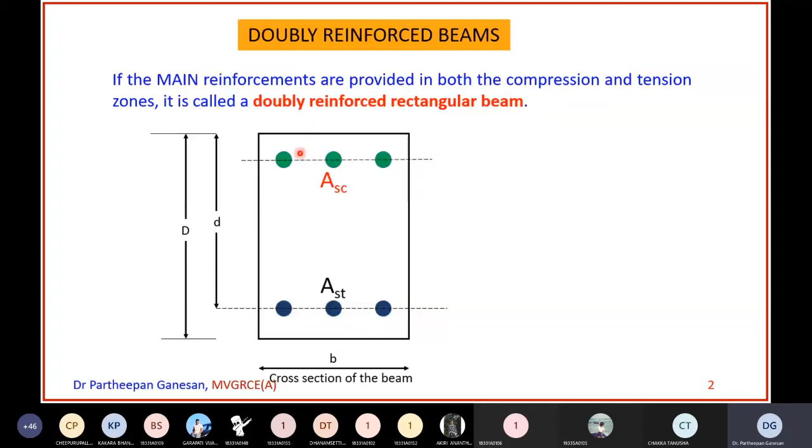Similarly, you also provide the area of steel in compression zone, that is ASC, and this is provided at an effective cover, and this is D dash. This effective cover to the compression steel is represented by D dash. Is that clear, everyone? Because this is the same thing, except in a singly reinforced beam you don't have this ASC. In a doubly reinforced beam you have ASC coming into the picture, and this area of steel in compression zone is provided at a depth of D dash, which is called effective cover to the compression steel. This is the only addition - all other things remain same. So this is how you represent the doubly reinforced beam.

So when they say effective cover to the tensile steel, that is from the extreme tension zone to this, that is effective.

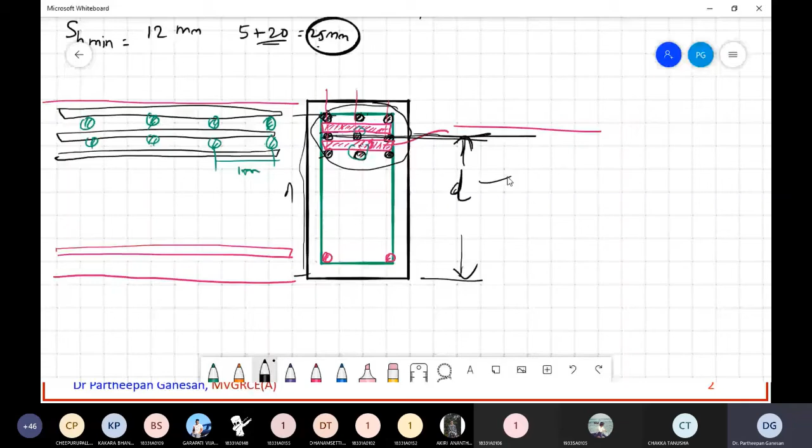One thing I forgot to mention in the earlier one. Suppose if you provided reinforcement like this, then the effective depth will become from here to - you have to find out the centroid of all this. It will be somewhere here - that becomes your effective depth. This is effective depth for whenever you have multiple layers of main reinforcement. The centroid of this reinforcement will become the reference, not from extreme fiber. I have discussed this before also. Whenever you provide the reinforcement in multiple layers, you have to find out where the centroid of the reinforcements will be - it will be somewhere here for this particular problem. So that will be effective depth, because only one layer is there in this case - so this becomes effective depth, and this is D dash.

Now look at vertical stirrups. I told you 2 leg means there are only 2 legs like this - this is 1 leg, this is another leg. Sometimes you can find 3 legged, 4 legged also, but we are not going to take that up right now.

So why should we use doubly reinforced beam? The most important question: why should we go for a doubly reinforced beam? So the reasons are given here.

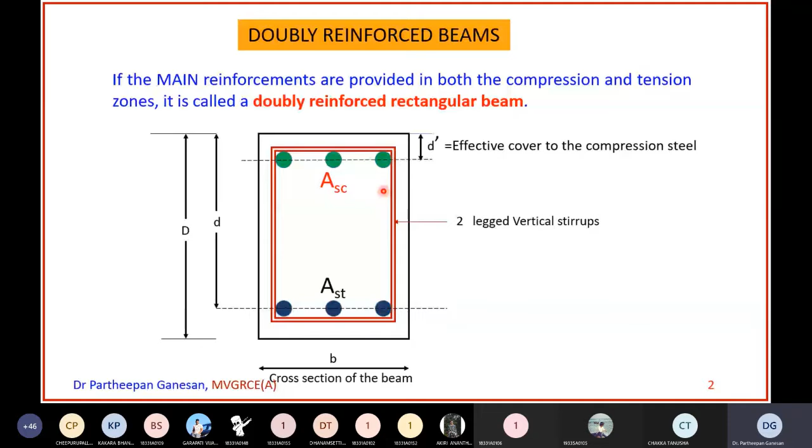Doubly reinforced sections may be necessary when architectural requirements restrict the depth of the beam. For example, for a long span beam and very heavy load, let us say the height of the room itself is 3 meters. Now, if you provide a beam of depth 1 meter, it will look very ugly in the sense that 1/3 of the room is covered by the beam height itself. But if you reduce the depth, architecturally it will have a very pleasing look. So if you want to reduce the depth of the beam, what you are doing is, in the compression zone, you are reducing the concrete area. When you are reducing concrete area, the compressive force it can take becomes very less - very less compressive stress.

So in order to increase the compressive strength, you are providing reinforcement in the compression zone also. So doubly reinforced section may be necessary when architectural requirements restrict the depth of the beam. In such cases, the beam has to carry moments greater than limiting capacity.

Increasing the depth of the beam creates two problems. One is that it increases self weight of the beam, because when compared to steel, the self weight of concrete is more. For a particular compressive force to be taken by steel or concrete, concrete will have more weight. So you are increasing the self weight by increasing the depth of the concrete.

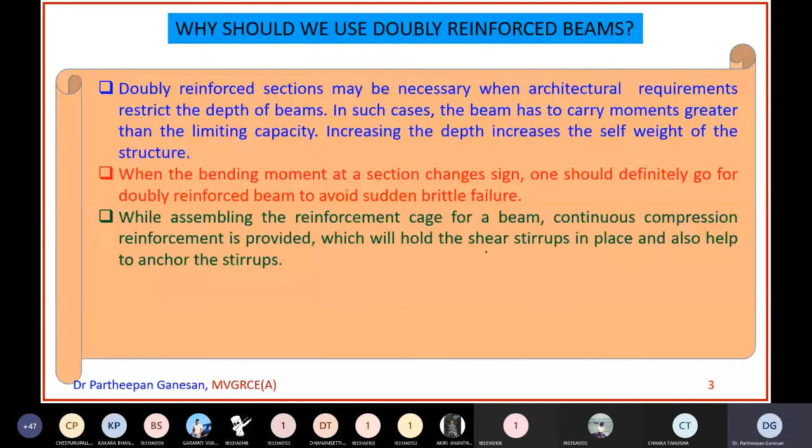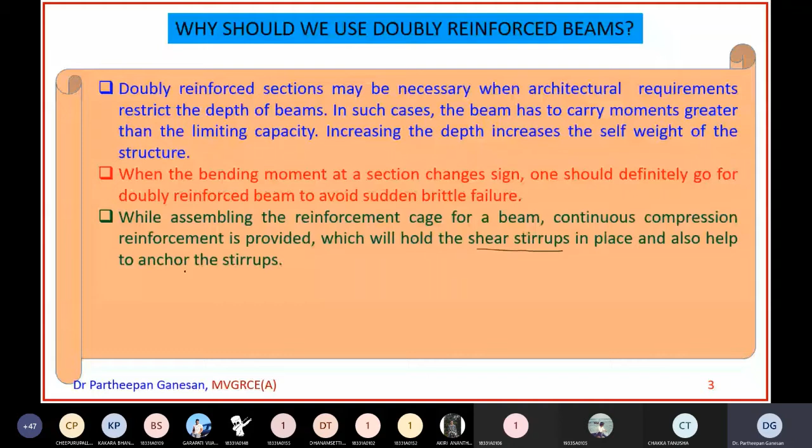Next, while assembling the reinforcement cage for a beam, continuous compression reinforcement is provided, which holds the shear stirrups in place, and also helps to anchor the stirrups. So instead of a hanger, while preparing the reinforcement cage, you are always providing reinforcement at the top, which will hold the shear stirrups also, and keep all the reinforcement intact. So that also acts as compression reinforcement.

Now, compression reinforcement provides safety in the case of reversal of stress due to wind load, due to seismic load, moving loads, or temperature stresses. For all these reasons, you should have a compression reinforcement.

Some sections of a continuous beam with wind load undergo a change of sign of the bending moment, which makes the compressive zone into a tension zone, which we discussed. These section changes can happen anywhere. Here, particularly, continuous beam is mentioned, but let us say a cantilever beam.

For example, in a swimming pool, let us say some people will be diving from here into the swimming pool. Before jumping, he will be jumping on the top of this. So it goes up, it goes down like this. It goes up, it goes down.

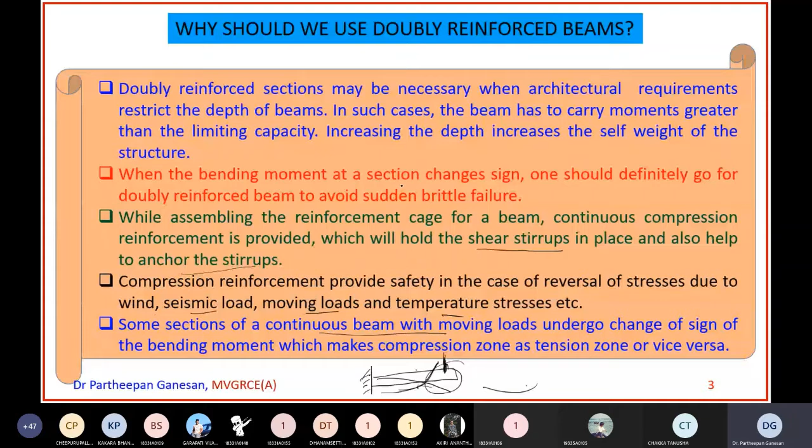So obviously tension is going to change its sign on this board. So that kind of thing also involves a reversal, bending moment changing its sign. So you have to provide reinforcement both at the top and bottom.

So now, what are the advantages of a doubly reinforced beam? If the required area of tension steel, please pay attention to this statement very clearly, if the required area of tension steel is more than the limiting area of steel, AST limit.

If the required area of tensile steel is more than AST limit, compression steel may be provided to increase the moment resistance capacity, because if you provide AST more than AST limit, this is called an over reinforced section. Brittle failure will happen and failure will be sudden. So in order to avoid that, you go for a doubly reinforced beam. You never design an over reinforced section, but you can go for a doubly reinforced section.

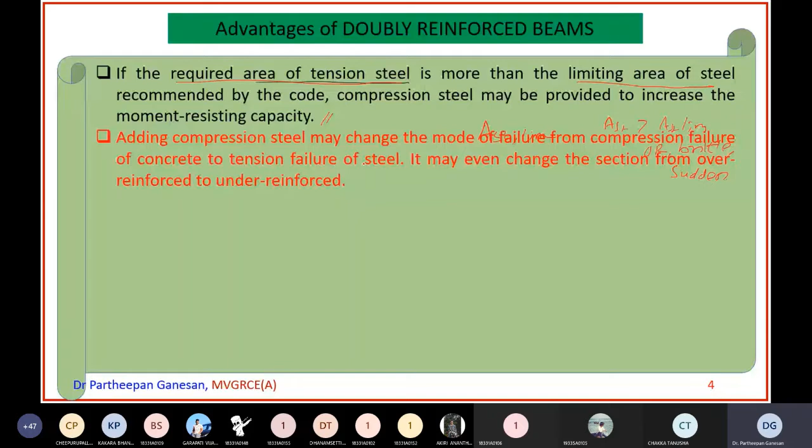Adding compression steel may change the mode of failure from compression failure of concrete to tensile failure of steel. It may even change the section from over reinforced to under reinforced section. That's what I told you.

Compression steel, in addition to increasing the resisting moment, also increases the amount of curvature that a member can take before failure, making the failure ductile. More curvature means more ductility. Thus, the ductility of the section is increased substantially, so a doubly reinforced beam will behave in a more ductile manner than a singly reinforced beam.

Compression steel is also effective in reducing long-term deflection due to shrinkage and creep.

Experiments on doubly reinforced beams have shown that the beam will not collapse even if the compression concrete crushes, when the compression steel is enclosed by stirrups. As shown earlier, in an over reinforced section compression failure takes place suddenly. But in a doubly reinforced beam, even though the concrete may fail in compression, the beam will not collapse suddenly.

Now let's look at the effect of compression reinforcement on the strength and ductility of under reinforced beams. Most of this data, numericals and figures are taken from N. Subramanian's book, Design of Reinforced Concrete Structures. The doctor has excellently presented everything, and I'm very grateful to him for the material.

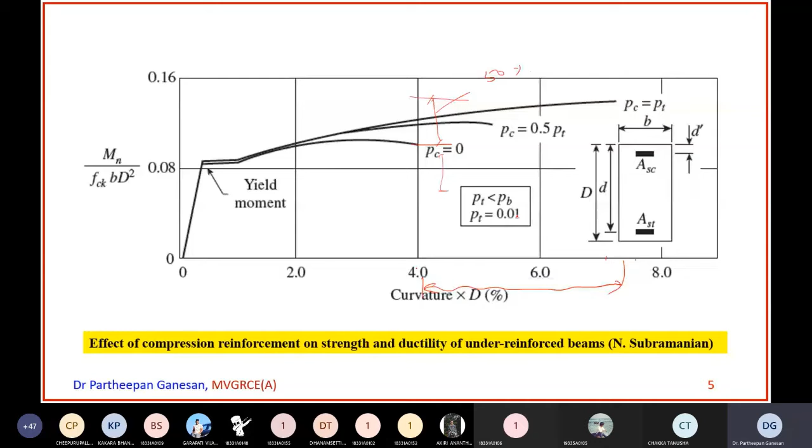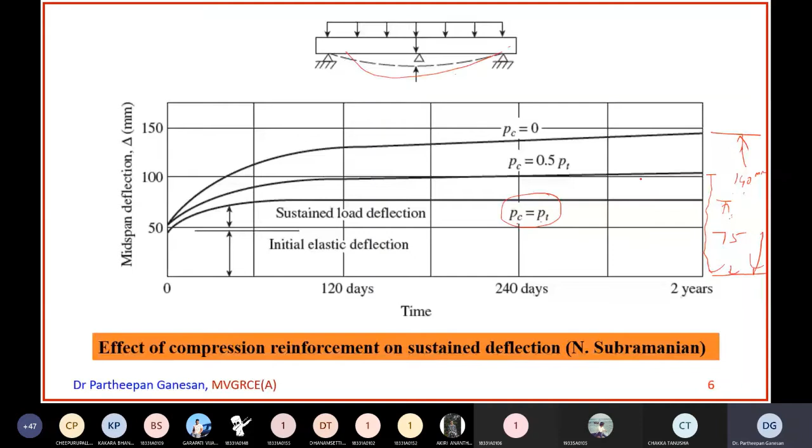Now, how will the stress block of doubly reinforced beams look like? It is exactly same as what you have for a singly reinforced beam, except that you are going to add.

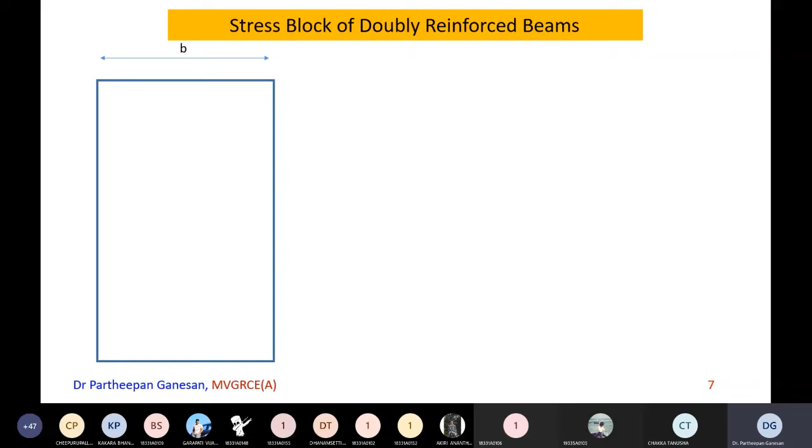We have the cross section of the beam only we are taking. The width of the cross section is B, and D is the overall depth of the beam, right?

D is the overall depth, from top to bottom. Now this is the cross section of the beam. This is the AST, remember, I am writing AST at the bottom.

This is the distance, the centroid of the tensile steel. Centroid of the tensile steel. Here is the stirrups, this red is the stirrups link. Stirrups is also called the link. Okay.

The distance between the topmost compression fiber to the centroid of the tensile steel is the effective depth.

Now for this, let us say this is your neutral axis, where the stresses and strains are 0 along this layer. Above this layer, even in a simply supported beam, all the layer above this will be compression.

All the layer below this neutral layer will be in tension. Now this x is the depth of neutral axis.

Now, this is the strain diagram which you refer to, page number 69 or 68. The maximum strain is 0.0035 according to 38.1 assumptions.

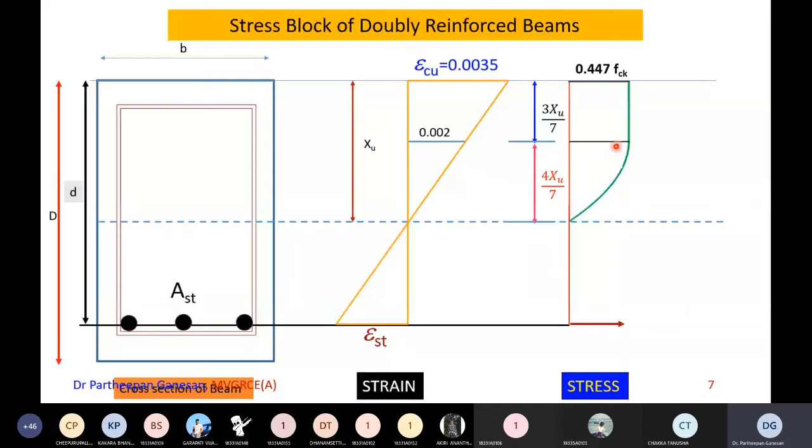Now, if you find out the total compressive force taken by the concrete, C suffix C, compressive force taken by the concrete is 0.36 FCK XU B. One thing, if you observe very clearly, compressive force I am always drawing towards this arrow is towards the left side.

Tensile force I am drawing towards the right side because this compressive force and this tensile force form a couple in an anti-clockwise direction. Okay, so don't show compressive force also in this side. Compressive force on this side, tensile force on the opposite side.

Similarly, here also you see compressive strain on this side, tensile strain on the other side. Okay, so that is to indicate above this all are compression, below this neutral axis all are tension.

Okay, right, so C suffix C is the compressive force resisted by the concrete alone, concrete in this compression fiber, 0.36 FCK XU into B.

This will act at a distance of 0.42 XU, right? 0.42 XU is the distance at which this compressive force acts.

Where the tensile force is called FST into AST. This total tension force resisted by all these steel put together is FST into AST, where FST is the stress in the tensile steel, AST is the area of total tensile steel.

FST: normally, in an under-reinforced section, FST will be equal to 0.87 Fy. Okay, so now this is all same whether it is a singly reinforced or doubly reinforced.

Anybody have any doubt? Doubly reinforced beam is most important. Most of the time in the examination or interview they will ask about it. So you should be very clear about it. So any question?

Anybody have any question, please?

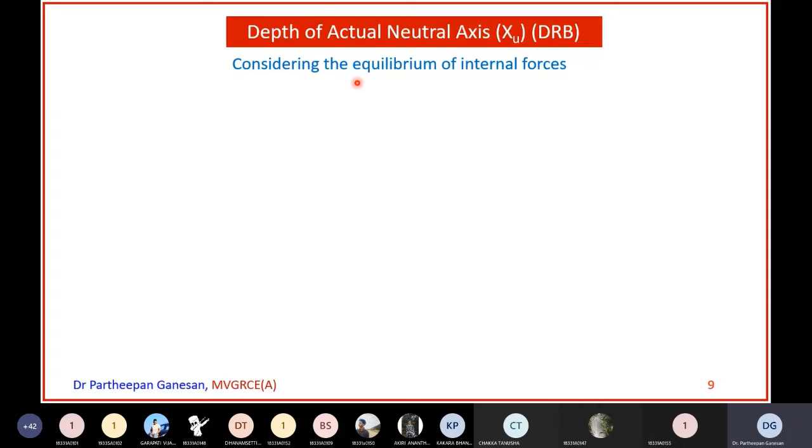So this acts as a distance of d dash. So these are all things that we have seen. Now, how to find out the depth of neutral axis? You should always consider the equilibrium of internal forces, that is compressive force is equal to tensile force. In compression force you have two terms, and tensile force a single term. That and all, if you write out all these things, you finally get this kind of equation.

This compressive force is resisted by the concrete, and compressive force resisted by the compression steel. This tensile steel term is 0.87 Fy into AST, because mostly we will design only for under reinforced section. So in under reinforced section, FST will become 0.87 Fy because steel starts yielding first.

So based on this, you can find out X is equal to 0.87 Fy AST minus FSC ASC, divided by 0.36 FCK B. In some case, let us say if your beam is not under reinforced, if it is over reinforced, then this is not 0.87 Fy. You have to substitute the actual value of FST, not 0.87 Fy. While solving numericals, we will see that. This is the way you find out depth of neutral axis for a doubly reinforced beam.

Now, this FSC value, if you have mild steel or Fe250 steel, which I explained sometime back also, is epsilon SC into Young's modulus of steel. Remember, this is only for Fe250 steel, not for any other steel. So this value should always be less than 0.87 Fy. For example, for Fe250, 0.87 into 250 will be almost 217.5, or some people take it as 218. So this FSC value, the maximum, the highest stress possible in that mild steel is only 218 Newton per millimeter square. You cannot go beyond that.

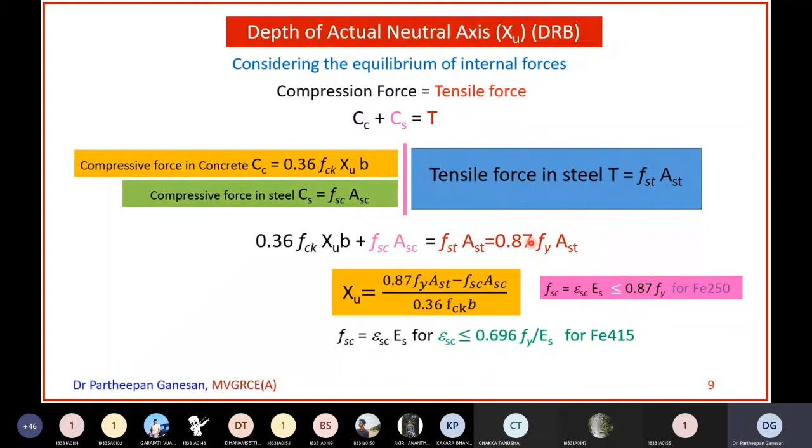Next, for Fe415 steel or Fe500 steel, FSC is given by epsilon SC into Young's modulus of steel, for epsilon SC less than or equal to 0.696 Fy divided by ES, because your stress strain curve is linear up to this point, up to this strain of 0.696 Fy divided by ES. After that, your stress strain curve has a parabolic part, which we also showed long back. So while solving the numerical, again we will get back into that.

Now, how to find out the ultimate moment of resistance? Remember, we discussed the compressive force resisted by the concrete, which is acting at a distance of 0.42 XU. So naturally, the distance between compressive force and tensile force is called the lever arm. Lever arm is D minus 0.42 XU, because from top to this level is D. From here to here is D. And this is acting at a distance of 0.42 XU. So the lever arm distance for compressive force and tensile force is D minus 0.42 XU.

You also have a compression force resisted by the compression steel, acting at a distance of D dash.

So for this force and for this tensile steel, the lever arm will become d minus d dash. If you want to find the moment of resistance, you take the moment of all these forces about this tensile steel. That is taking moment of all forces about the tensile force. What do you get? Cc multiplied by perpendicular distance, then Cs multiplied by perpendicular distance d minus d dash, that's the second term.

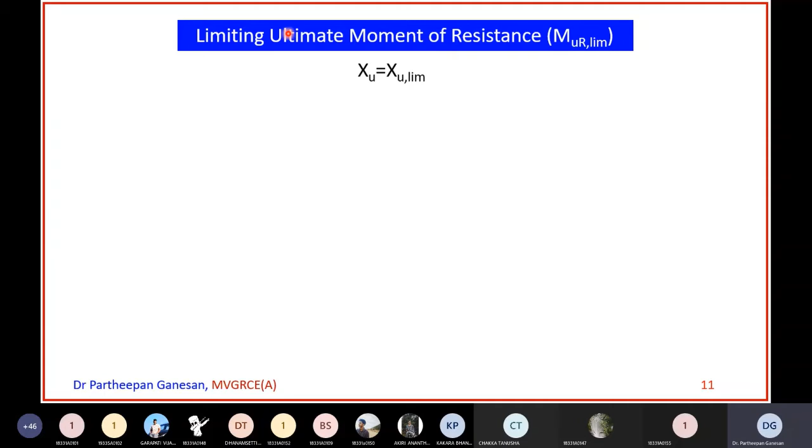Now, how do you find out? Just like in a singly reinforced beam you have a MUR limit, similarly you also have it for a doubly reinforced beam. This is the limiting moment for a balance section. MUR for a balance section is called the limiting ultimate moment of resistance. In a balance section, XU will be equal to XU limit.

If XU is less than XU limit, what kind of section is it? Under reinforced. If XU is more than XU limit, it is over reinforced. XU equal to XU limit is a balance section.

Now, if you replace XU with XU limit in the previous equation, that becomes your limiting moment of resistance for a doubly reinforced beam. Remember, in a singly reinforced beam you have only this term; in a doubly reinforced beam, this is the additional term.

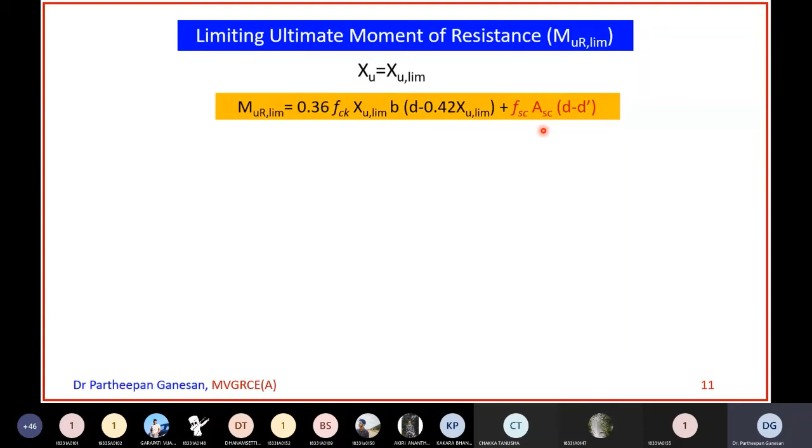Now, compression reinforcement for a balance section. Just like you have AST limit, the percentage of tensile steel required for a balance section, similarly for compression steel the limiting percentage PC limit is given by 0.87 Fy into Pt minus Pt limit, divided by FSC minus 0.447 FCK, for XU equal to XU limit.

If you clearly observe, this term is written in blue because compared to FSC, this value will be much less. So in many books you can easily neglect this. For example, FSC for Fe415 steel may be around 350. If you're using M20 concrete, this value will be only 9. So 350 or 341 does not make much difference to the percentage of steel. That's why many books have neglected this 0.447 FCK term. If you want to use it, that's fine, or if you don't want to, it's okay.

Fy is the yield strength of steel, 415 or 250 or 500. Pt is the percentage of provided reinforcement, that is 100 AST by BD, called PT. PT limit is 100 AST limit by BD. This is PC limit, meaning percentage of compression reinforcement required for the limiting section. FSC is the stress in the steel, so this is the PC limit.

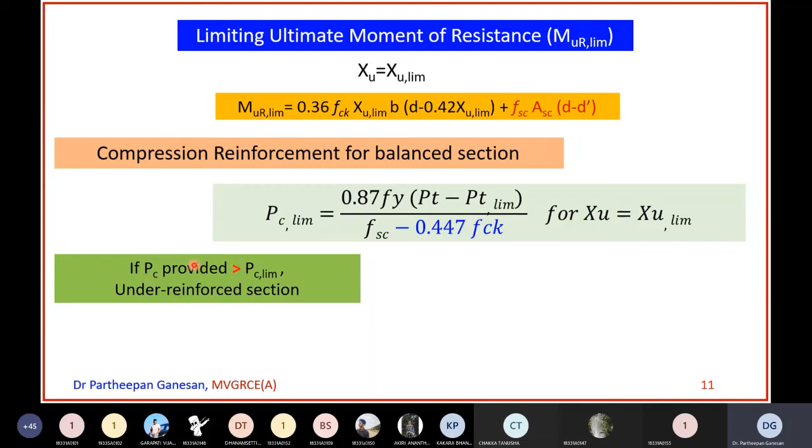Now, if PC provided, the percentage of compression steel provided, is greater than PC limit, it is an under reinforced section. Please remember this is completely inverse of your tensile reinforcement. If the percentage of steel provided in the compression zone is greater than PC limit calculated from this equation, then it is under reinforced. Otherwise, if PC provided is less than PC limit, it is an over reinforced section. So you have to increase the amount of reinforcement in the compression side to make it an under reinforced section.

Now finally, you can also write this MUR limit based on the steel. This is represented with respect to compression forces — this is compression force, this is also compression force. Suppose we want to write it with respect to tensile force, this is the formula: 0.87 Fy AST limit into D minus 0.42 XU limit. This is for the balance section.

Plus 0.87 Fy into PT minus PT limit, into D minus D dash, by 100. So you can use this equation or that equation.

Remember, this equation is not given in the code. This moment of resistance in terms of tensile reinforcement, limiting moment of resistance in terms of tensile reinforcement, is not given in the code. So you should make a note of it.

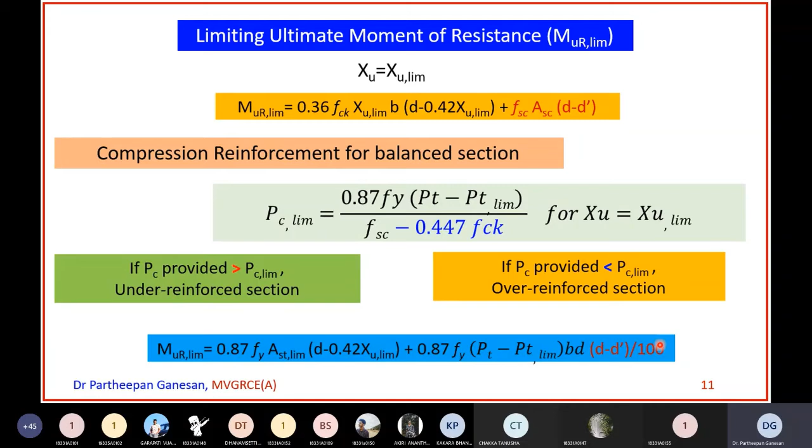Okay, so now when a beam is considered to have compression steel, let us say you provided some steel, whether it will be accounted towards compression steel or not is decided as follows: when Asc is provided, it should be equal to 0.4% of the area of concrete in the compression zone above the neutral axis. If you calculate the area of compression zone alone, multiplied by 0.4%, at least that much area Asc should have been provided. Then you can consider that as compression steel. If it is provided less than that, it is not considered.

Either this one, or 0.2% of area of the whole cross section, including, for example, if you take a rectangular section, let us say this is your neutral axis, XU, this is B. So either it should be 0.4% of B into X, this being concrete in the compression zone, or 0.2% of B into D, the whole section.

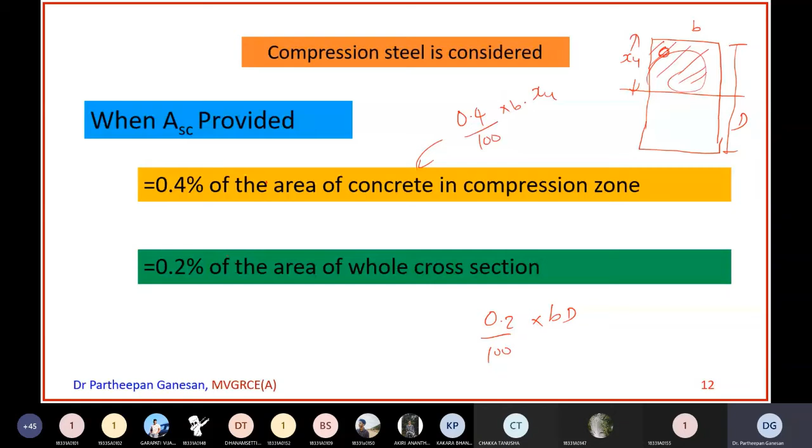So either this much should be there or this much should be there. Then only the steel provided in the compression zone is taken into account. Otherwise, we will simply neglect this steel. It is not able to take any compression force. That's how it is taken.

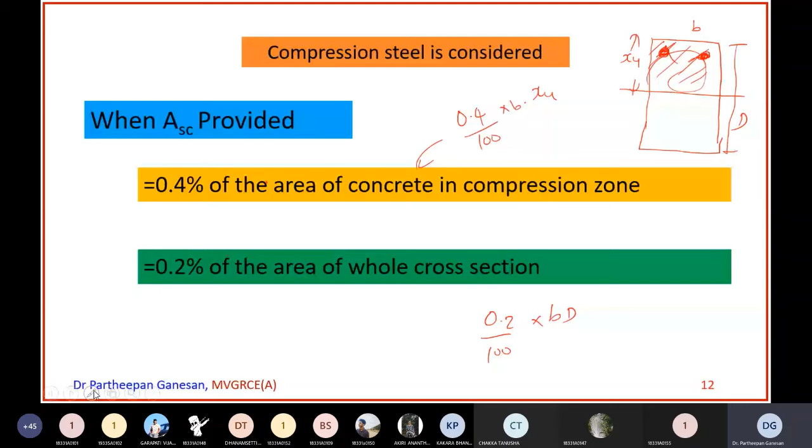This yield strain value, epsilon y, is calculated as 0.00108, which I explained some time back also. Please go back and prepare that. 0.00108, that is the strain at yield for Fe250 steel.

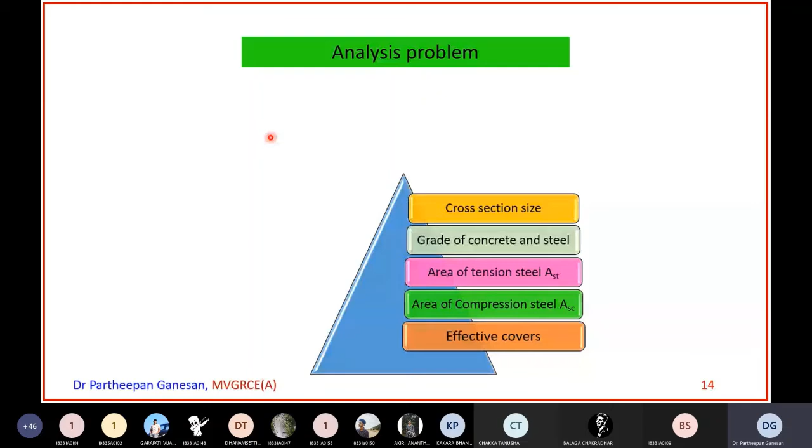So what will be asked is you have to find out the capacity, that is the flexural capacity or moment capacity of the section. That is called an analysis problem. So here you will be given cross section size, grade of concrete and steel, area of tension steel. If it is a doubly reinforced beam, you will also be given area of compression steel as well, and then the effective covers to this steel will be given. Then you will be asked to find out the ultimate moment of resistance of the beam, this is the flexural capacity of the beam. So this is an analysis problem.

In the design problem, what are the data given and what are we supposed to do?

In the design problem, load will be given, span will be given. So you have to find out grade of concrete and grade of steel, which will be given. You have to find out the cross section size. You have to find out area of tension steel, area of compression steel, right? That is called design problem.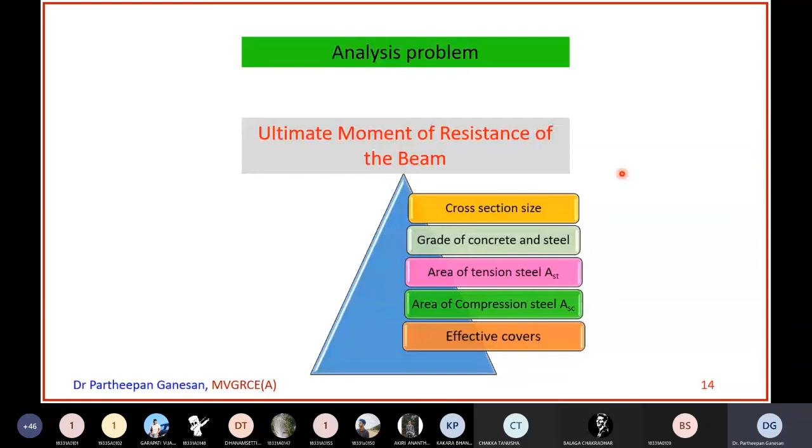So first we will look at analysis problem, then we will go with the design problem, right? So first, analysis problem.

Calculate the ultimate moment of resistance of a doubly reinforced beam having b equal to 300 mm, effective depth d equal to 550 mm, reinforced with rebars of 3054 millimeter square in tension zone and 982 millimeter square in compression zone, at an effective cover of 50 mm to both tensile and compression steel. Take Fy as 250 MPa and FCK as 20 MPa.

Is that clear? By reading, because in the examination they will not always tell you directly, here it is written as a doubly reinforced beam. But many times this 'doubly' will not be given. They will simply write calculate the ultimate moment of resistance of a beam having this data. You should ascertain whether it's doubly reinforced or singly reinforced, because here it's clearly given reinforcement in tension zone and in compression zone, so you should know it is a doubly reinforced beam.

So as usual, the first step, you write down all the given data with the symbols. B is 300 mm, D is 550 mm. As I told you, effective cover to the compression steel is D' equal to 50 mm. AST is given, ASC is given. Fy is given, FCK is given.

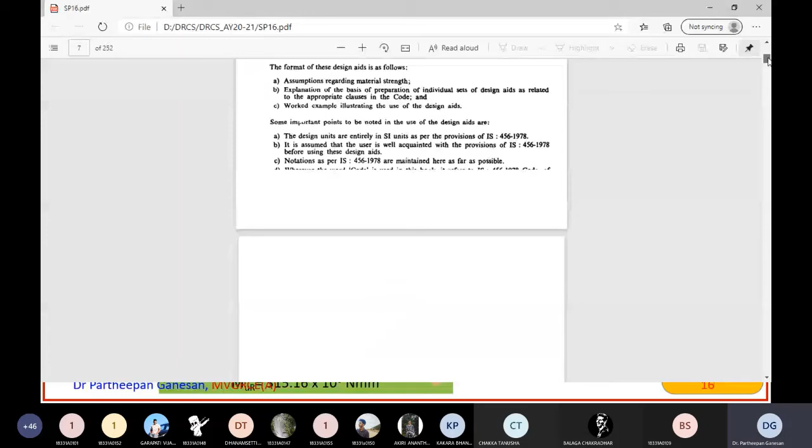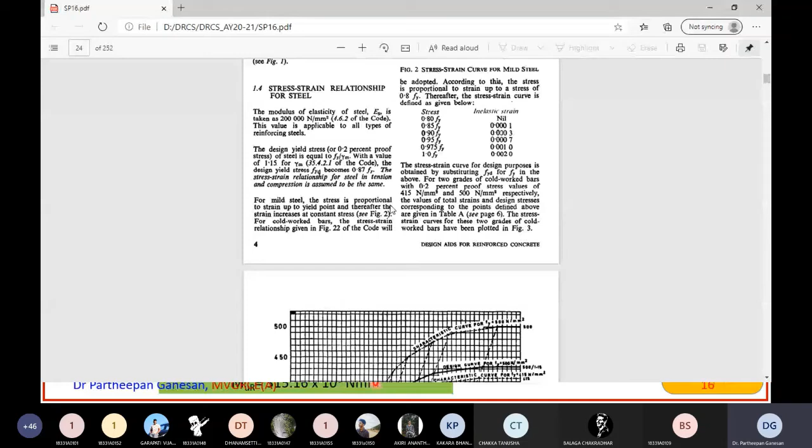So this curve 3, figure 3, I told you this is from SP16 only. There, this is the stress strain values, and there's also another one given in terms of a table. That also I gave in the PPT, right? Now here, if you see.

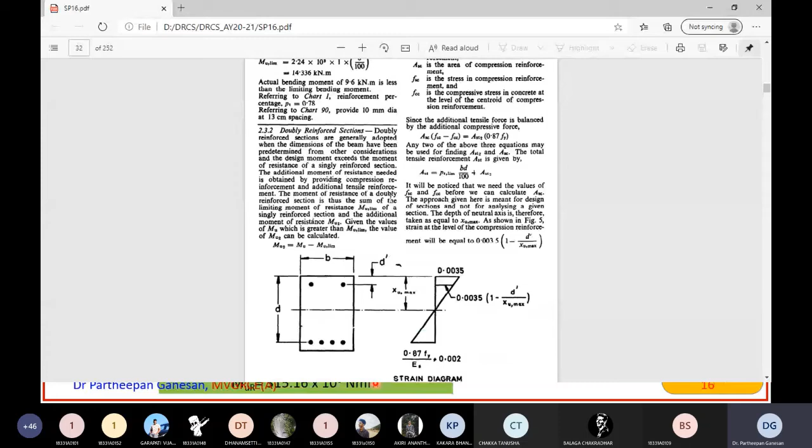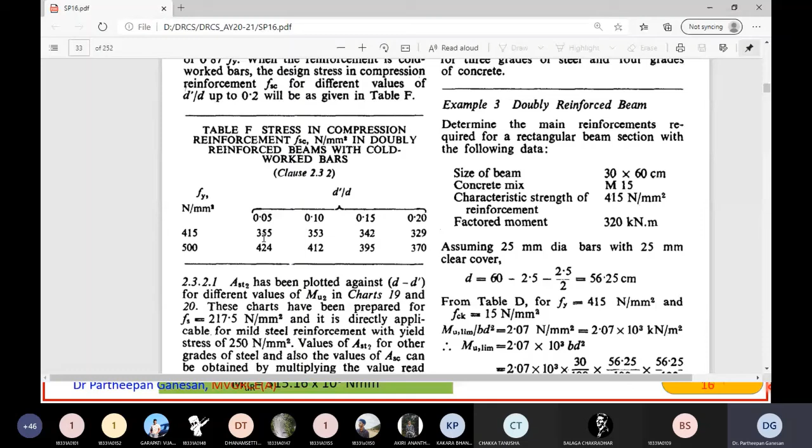See here, if you read this sentence: the approach given here for doubly reinforced section is meant for design of section and not for analyzing a given section. So many people use this method for analyzing the section, but the code clearly says the approach given here is meant for design, not for analysis. Many times people take d dash by d, and from this they take the FSC value, finding d dash by d and then taking the value from here. If it is 0.1, 353, if it is 0.05, 355, and in between you linearly interpolate. But that is only meant for design, not for analysis. So I found this method to be more appropriate for finding out the moment of resistance.

That is why I have chosen this method. But this is given in Design of Reinforced Concrete Structures by Menon and Pillai, and Subramanian also follows this approach. But all other books follow some different approach, which in my opinion can be used for design, not for analysis, as per the Indian code.

Okay, any doubt in this so far? Anybody? If any one of you has any doubt, yes. Sir, once again repeat the epsilon SC, sir.

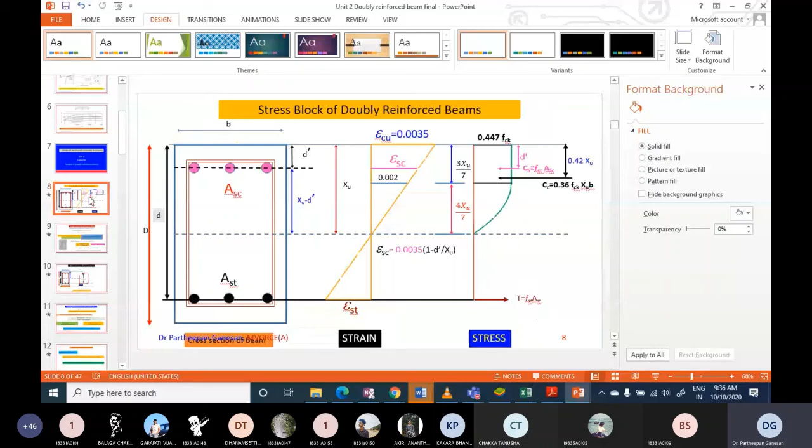Epsilon SC, see, epsilon SC means what? Strain in the... one second. See here, one second. From this you already found out XU value to be 208, right? This is the neutral axis, this is the extreme fiber, this is 0.0035.

So for this much height the strain is 0.0035, right? Now I want the strain at this place. This height is how much? D dash, right, D dash. And what is this height from the neutral axis till here? That is XU minus D dash. So for XU it is 0.0035, and for XU minus D dash it will be epsilon SC. That epsilon SC comes from the similar triangle principle, right?

Yes sir, that's all. Any other doubt? No sir, thank you. Anybody else? Sir? Yeah. Sir, previously we found out the XU.

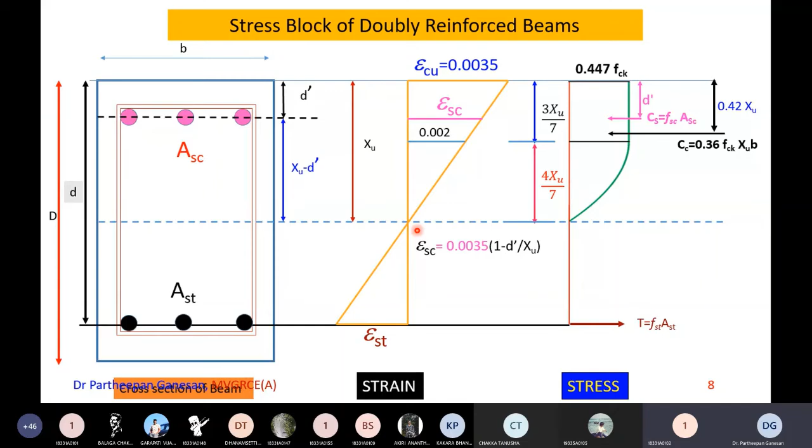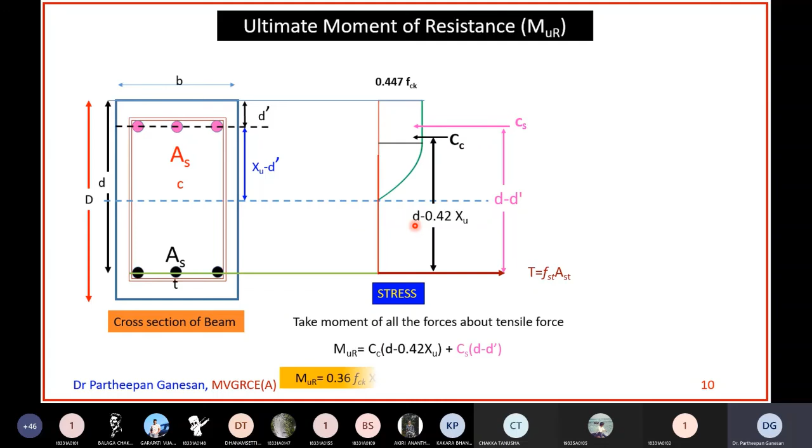Why should you take FST and FSC as 0.87 fy? Because that is the maximum value, I cannot go beyond that. And if you have to take a value less than that, less than can be any value, there can be infinite number of values less than 0.87 fy, right?

See sir, why should you take 0.696 fy? Is it possible, sir? Because if you do the tensile test on Fe415, Fe500 steel, it almost follows this line, till up to this much it will be linear. This is from the experimental curve.

So if you test the steel, it will almost follow the linear line up to this much. After that it starts yielding, right? This is the approximation. Steel will always exhibit some initial linearity, that is, stress will be proportional to strain. So they found that this will be a good approximation. That is why 0.696 fy is taken.

Okay, okay sir. So any other doubt? So these are again very simple: find the XU max value, find the XU value. The only difference is that here FSC comes in.

Now this formula is also written here. In some books they write it like X is equal to FST into AST minus FSC minus FCC into ASC, like that, divided by 0.36 FCK into b. This is for, suppose in a compression zone, if you are providing 2 rods.

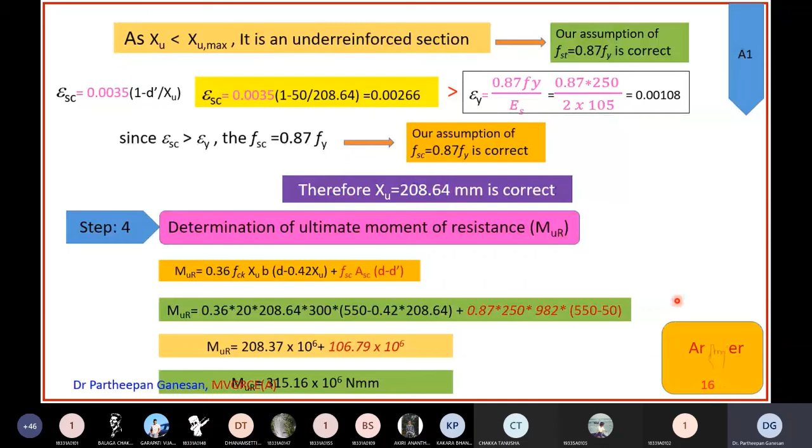Now the next question is the same problem, but instead of Fe 250 steel, you have Fe 415 steel. All other data remain same. Only thing is that Fy has changed to 415 MPa.

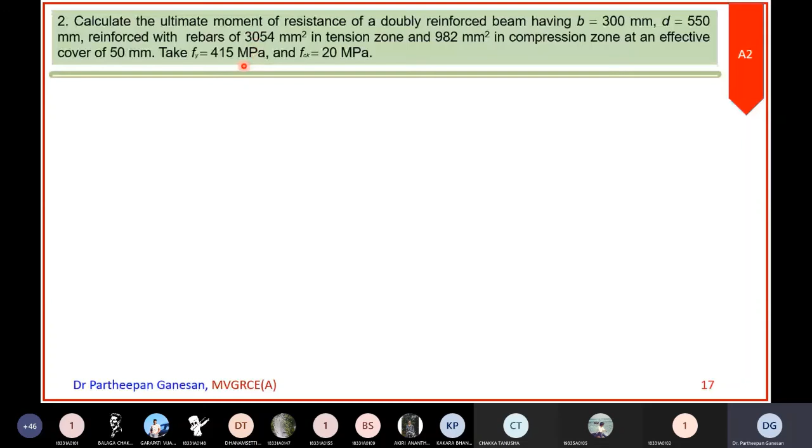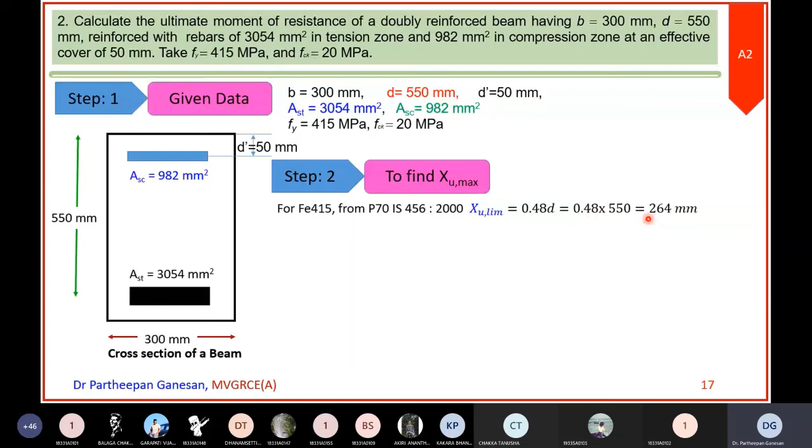Now let us see how the moment of resistance varies. Step 1 is given, same as whatever we have done in the previous sum. Xu max of course will vary because Xu max for Fe 415 steel is 0.48D as opposed to 0.53D in Fe 250 steel. So you got 264 millimeter as the Xu max or Xu limit.

Now again you have to find out XU. We are writing the same general equation. In this, FST and FSC you assume as 0.87 Fy, both values are 0.87 Fy. AST you know, ASC you know, FCK you know, B you know.

So if you substitute all these values in this formula, you are getting XU as 346.34 millimeter.

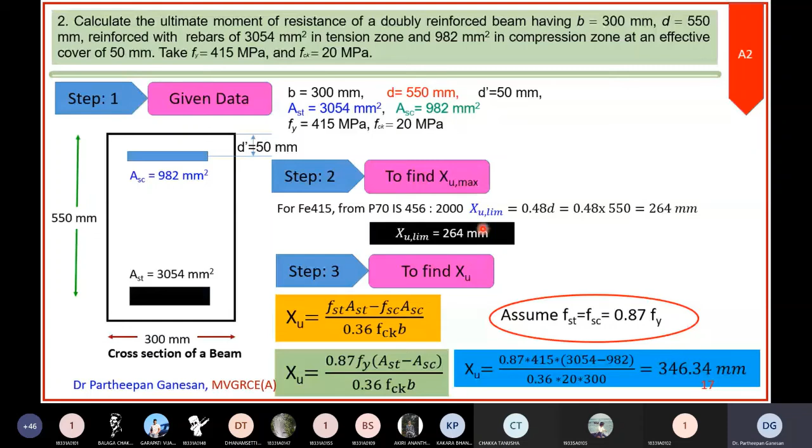Obviously when you compare XU value with the Xu limit, it is an over reinforced section. Over reinforced section means your tensile steel will not yield. Remember, before tensile steel yielding, your concrete in the extreme compression fiber will fail, will crush.

So FST equal to 0.87 Fy is not a correct assumption, which means your calculated value of XU is not correct. So since it is coming out to be an over reinforced section, we can take XU as XU limit.

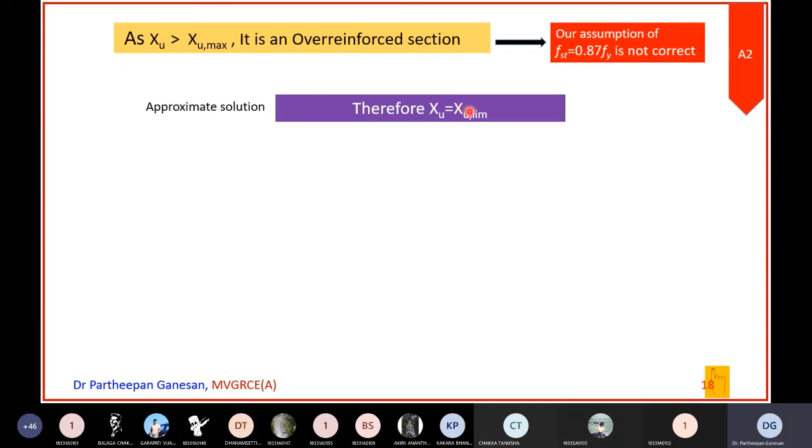Remember this is only an approximate solution, but if you want the exact solution, you have to do it in a trial and error manner. That I am skipping now. You can just use this one, since it is an over reinforced section, you can use Xu is equal to Xu limit.

Then find out the limiting moment of resistance for a doubly reinforced beam: 0.36 FCK Xu limit B into D minus 0.42 Xu limit, plus FSC into ASC into D minus D dash. Now the problem is we have not found out the FSC value.

So to find out FSC value, because it is considered as Xu is equal to Xu limit, you have to use this equation: 0.0035 and 1 minus D dash divided by Xu, but in this case Xu is equal to Xu limit. So if you found that, it is coming out to be 0.00284.

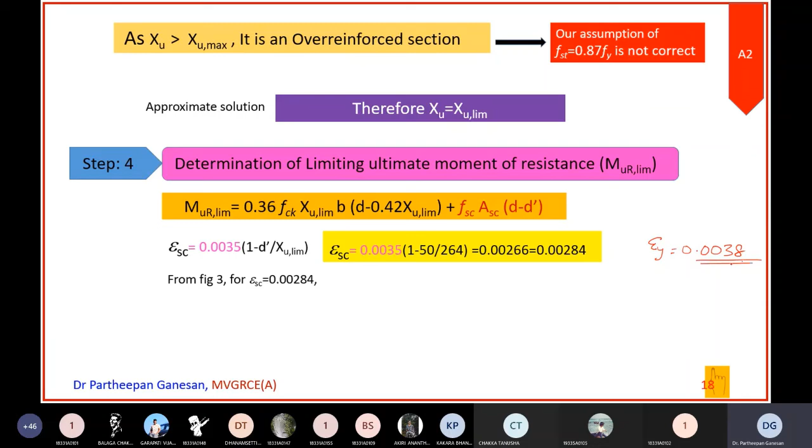Now what is the yield strain for Fe415 steel? If you remember, from figure 3, yield strain for Fe is equal to 0.0038 something. Obviously your strain is only 0.00284, which is less than the yield strain of 0.0038. So your FSC value, if you calculate it, FSC will be less than 0.87 Fy.

Now that you have to find out from figure 3, epsilon SC is equal to 0.00284, that comes from this figure. I will show in SP16.

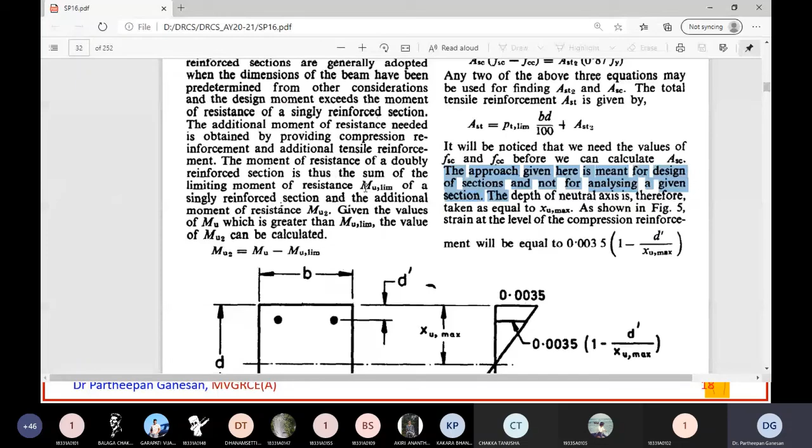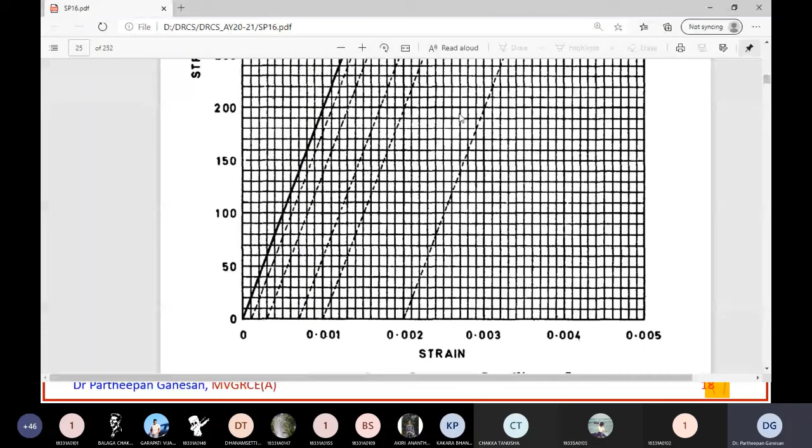Figure 3. See here, this is 0.002, this is 0.003, this cannot be calculated, that's the problem. Okay, so are you able to see the graph? Yes sir. So is the cursor visible near the strain? Yes sir. Okay, so this is 0.003, this is 0.002, so 0.0028 will be close to this somewhere here. So if you go along this line, in the top, whatever the value is there, that is your value.

Sorry, actually we can't see it, the cursor is not visible in this. So what will I do? One second, I will put it. I will see whether I have the figure here or not. Okay, remember this 0.00284. I will show you where it is. Is it there somewhere, this graph? I have put this graph somewhere, I have to see. No, here, okay.

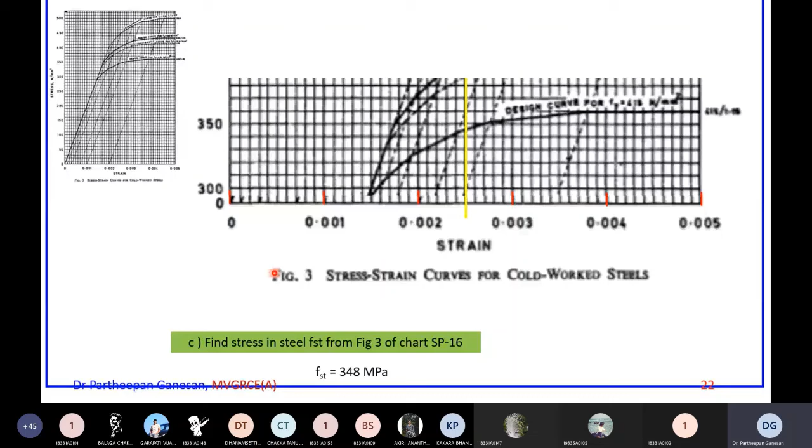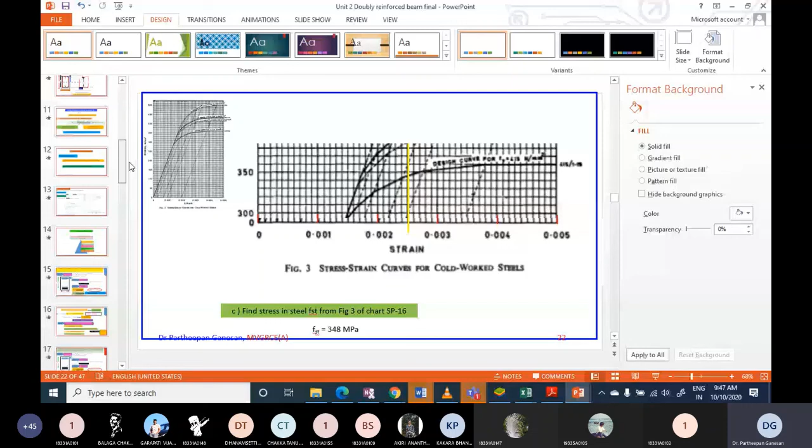Or what you have to do, you have to use this table, I don't know if the table is here or not. Yes, here. See, for Fe415 steel, here you see here, 0.00276, how much is the value? 351. So at 0.0038 it is 360. So for 0.00284, it will be more than 351, less than 360, and it will be close to 351 only because at 0.00276 it is 351. So 0.0028 will be 352 or so, whatever.

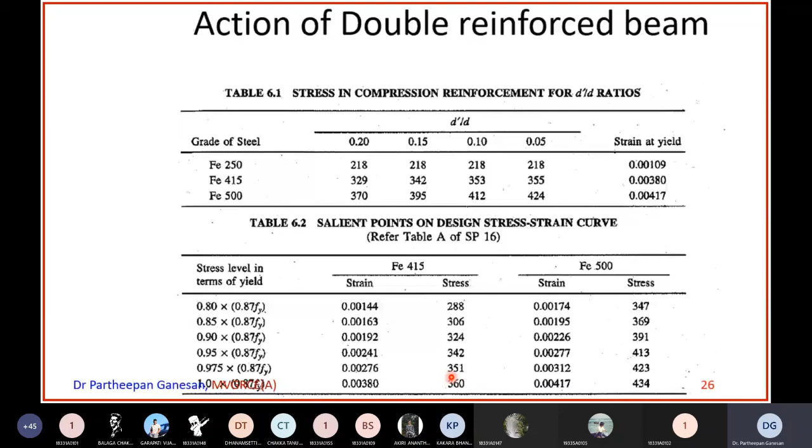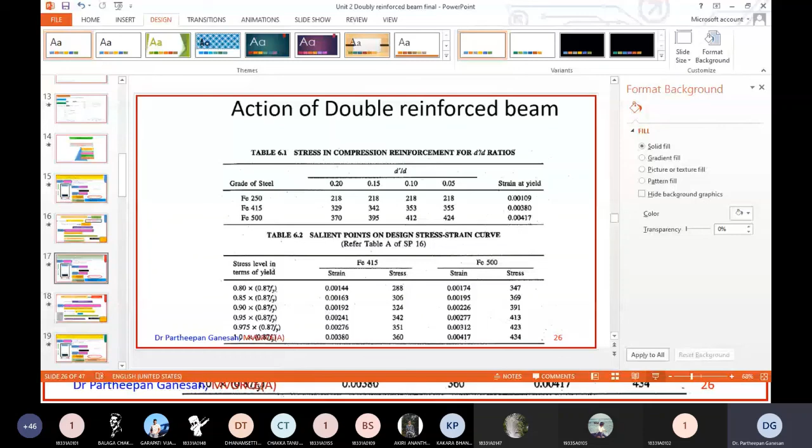Okay, so you can interpolate there, you can get the values. So what I got here is... okay, this is... done.

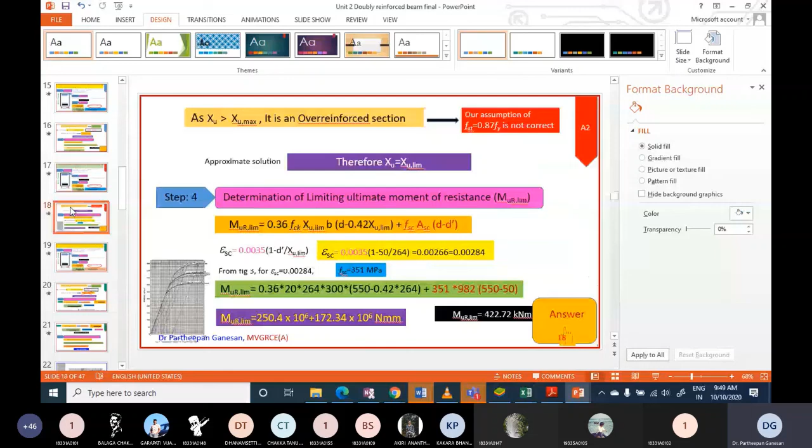So epsilon SC is coming out to 0.00284. So if you do interpolation, 0.00276 to 0.0028 is almost one and the same. So for epsilon SC equal to 0.00284, your FS is 351 MPa, you have taken from this figure. Okay, from the table it will come 352. So 351, 352 does not make much difference. So FSC is equal to 351.

0.87 into 415, how much? Calculate and tell me, 0.87 FY. 0.87 into 415, how much? 361.05 sir. So if your steel got yielded, the stress would be 361. But because it has not yielded, you got only 351. 351 is less than 361, that is why the steel has not yielded, and the amount of stress is 351 MPa.

Now substitute this 351 MPa here. ASC, you know, all our quantities you know. So MuR limit is equal to 0.36 FCK, Xu limit you found out before only, 264, 300, D minus 0.42 Xu limit, plus FSC, ASC into D minus D dash. You can also write directly this one.

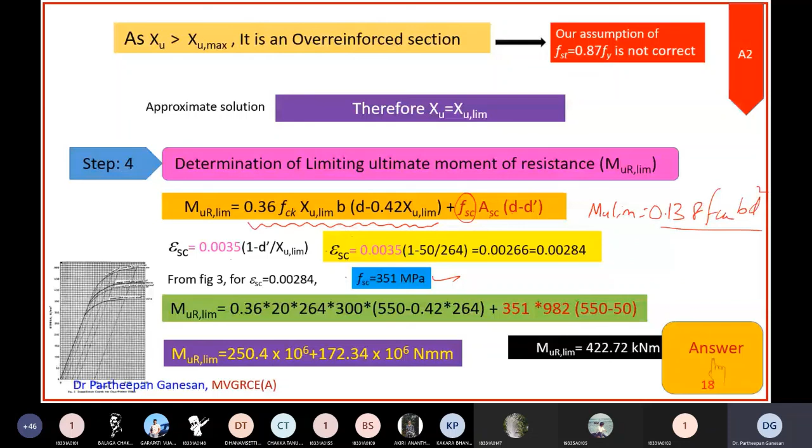But again, you have to go back and refer whenever the class is on that same day. You go back and refer, you will be able to understand better. But if you refer after 1 month or 2 months, it will be very difficult.

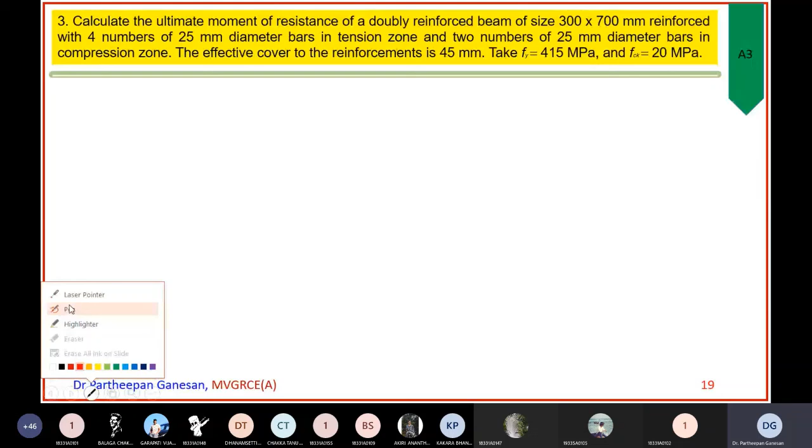Okay, then the last problem in the analysis. Again it is a doubly reinforced beam of size 300 mm by 700 mm, reinforced with 4 number of 25 mm diameter bars in tension zone, 2 number of 25 mm diameter bar in compression zone. The effective cover to the reinforcements is 45 millimeters. Take Fy 415 and FCK 20 MPa. Here also you have to find out the ultimate moment of resistance of a doubly reinforced beam.

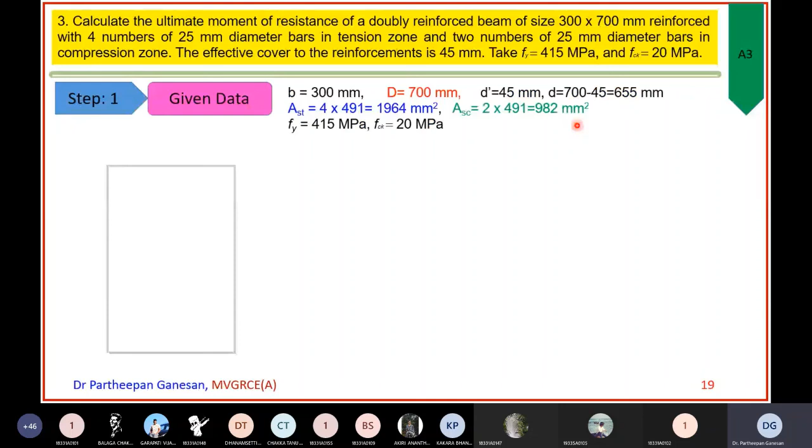So here also same thing, so I am going to skip it till XU. So XU limit again 0.48d, you got 314.4. Now to find XU, I am assuming again FST, FSC as 0.87 Fy and calculating the value of XU. That is coming out to be 164.14 millimeter, right? So XU limit is 314.4, XU is 164.14. So it is an under reinforced section. So as XU is less than XU max, it is an under reinforced section. So under reinforced section means what? Your tensile steel will yield first.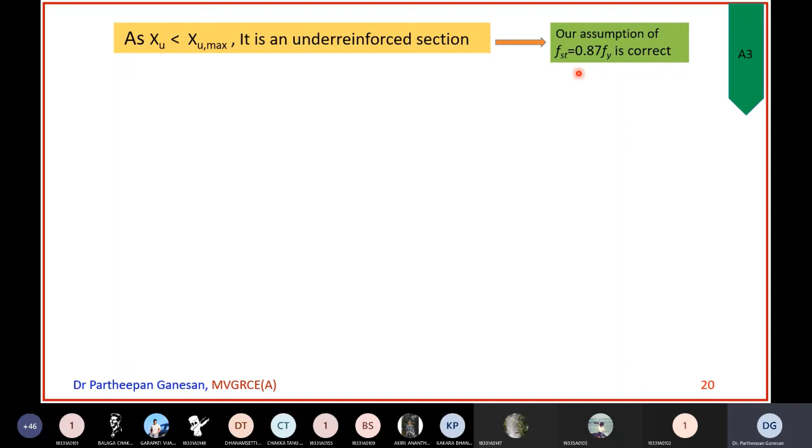So if our assumption of FST equal to 0.87 Fy is correct, now epsilon SU you find out. For XU it is 0.0035. So XU minus D dash, how much it is? You find out substituting this value. It is coming out to be 0.00254, epsilon SC.

But for Fe415, epsilon strain at yield is 0.0038. That means your strain is less than the yield strain. That means your FSC, the stress in the compression steel, is not 0.87 Fy because the strain in the steel is less than the yield strain.

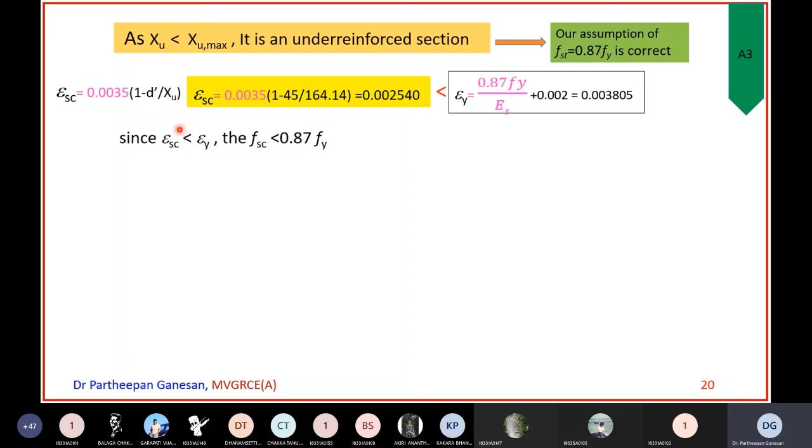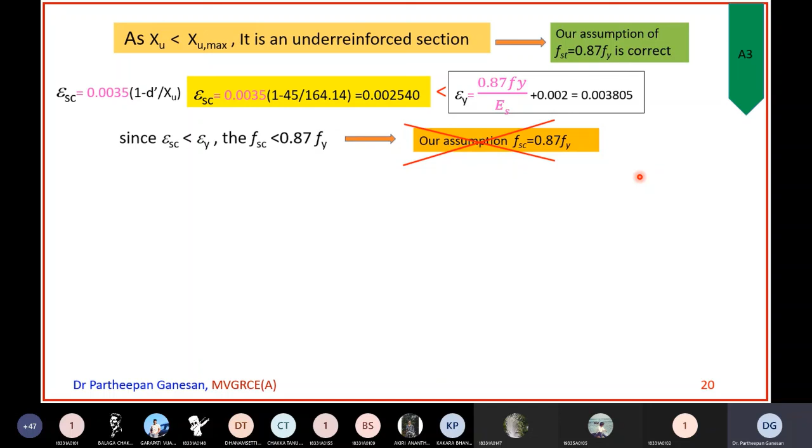So consequently, the stress in the compression steel will be less than 0.87 Fy. That we have to find out. Now how to find out? Since epsilon SC is less than epsilon Y, therefore FSC will be less than 0.87 Fy. That means our assumption FSC equal to 0.87 Fy is not correct. Because 0.87 Fy is not correct, and you have determined the value of XU based on 0.87 Fy, therefore your XU value found out is also not correct. Is it clear? Any doubt so far?

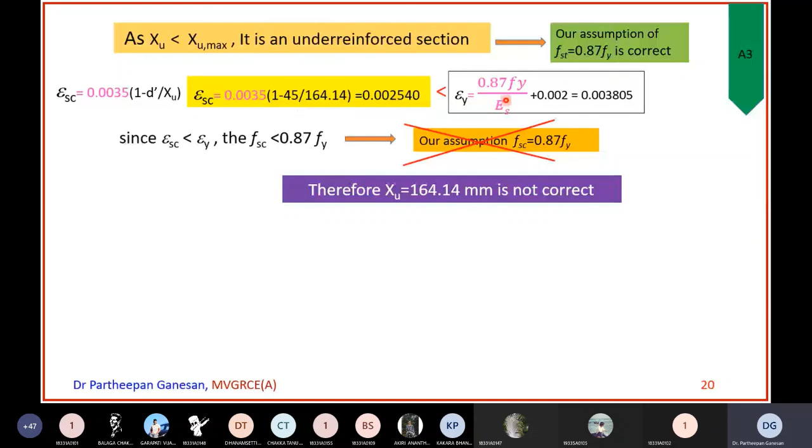The XU came out to be less than XU max, so we thought our assumption of FST equal to 0.87 Fy is correct. But for that XU value, if you find out the value of FSC, FSC is coming out to be less than 0.87 Fy. That means our XU value 164.14 is not correct. This has to be revised. Now, how to revise it?

How to revise this? So determination of stress in compression steel, FSC. Our FSC value is not 0.87 Fy, which is 361 Newton per millimeter square. We have to find out FSC. Then after finding out the correct value of FSC, we can find out the value of XU. Alright, so how will you do the first trial?

Assume epsilon S is equal to 0.00254. Previously we assumed that the strain is yielded, that means we assumed 0.0038, and using that we calculated XU value. Now what we are going to do is, based on this computation, we got this initial value as 0.00254. We are taking that value as the strain in the compression steel. For this strain, again if you calculate FSC value from the figure, that figure as I shown you some time back, at 0.00254.

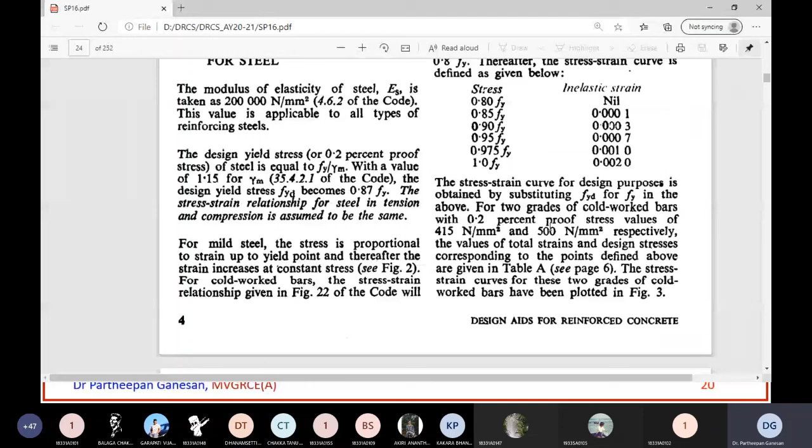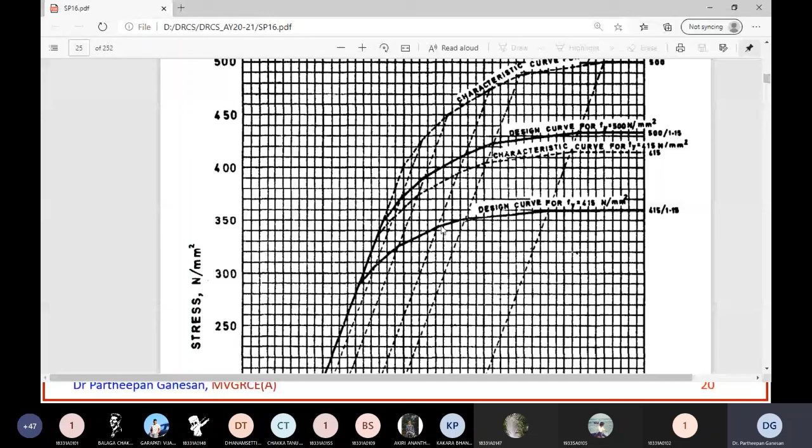If you take it from the graph... or we can take it from the table also, no problem. 0.00254 is here, somewhere here. So here you may not be able to see, and I cannot mark it here also. Somewhere below 350, that line is there. So you can see, later on I will show you how to do that. So for that, FSC value is coming out to be 347 MPa.

Now knowing this value, substitute this value in the XU formula. FST into AST minus FSC into ASC, 0.3. For FST you will put 0.87 Fy only, but for FSC you will substitute 347. If you substitute this value, your XU1 in the first trial is coming out to be 170.53 millimeters.

Now what was the earlier value? The earlier value was 164.14. Now you got 170.53. You have to keep repeating this trial until you get two successive values of XU almost the same. In the first trial you got 170.53, so this is not converged. This is 164, this is 170, so now I have to continue.

So I have to find out the epsilon SC for this 170.53 value. My epsilon SC is coming out to be 0.002576. So for this value, I am assuming now — this is the first, I assumed from this value 0.00254, for that I found out FSC. That FSC value was substituted here to find out XU1. Now this XU1 value is substituted in epsilon SC to find out the next strain.

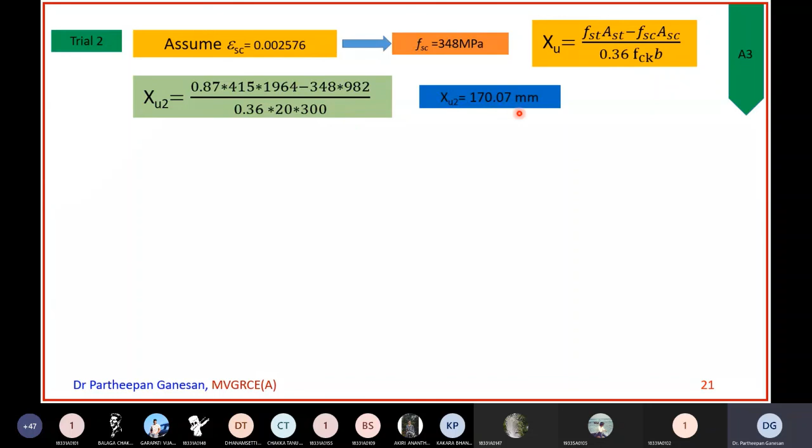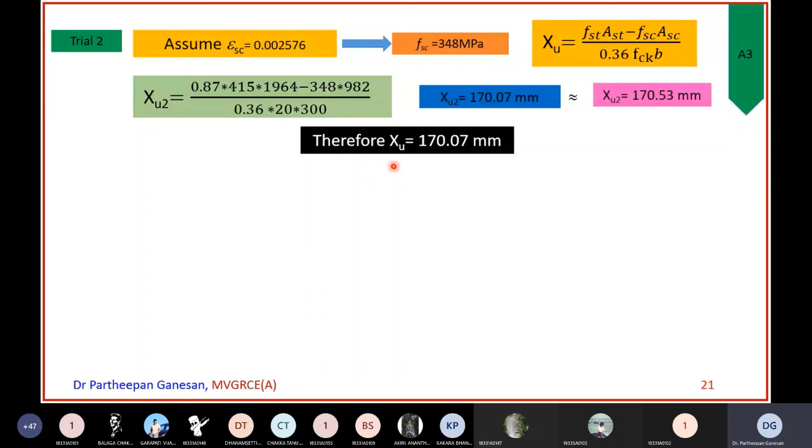Now you take this next strain as a fresh value and find out FSC, that is 348 MPa, and substitute in XU, you are getting 170.07. Now it is almost equal to 170.53, right? 170 is coming, so you can stop here. That means your FSC is 348 MPa, so therefore your XU is 170.07.